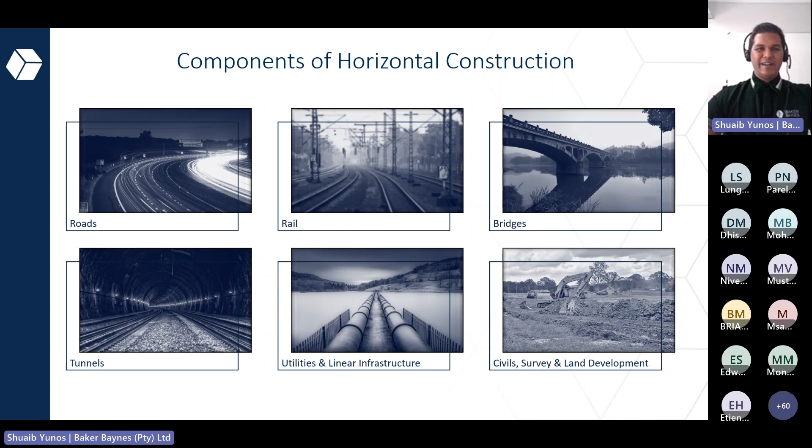So let's look at the industry context specifically from a South African perspective in the civil engineering or infrastructure industry. Now, if we had to simplify this, we would have to say that there are different components of infrastructure. The components being horizontal. So if you're looking at roads, rails, bridges, tunnels, linear or utilities, as well as civils, so your pipe networks, those type of things, we characterize them as horizontal construction. So anything going probably that way, it is horizontal, right? And you can see these are very critical components already from an infrastructure perspective.

Now, we've also got the vertical portion, that being the components of vertical construction. So your typical skyscrapers, your telecom towers, housing, real estate, industrial parks, steel structures, sporting and recreational, as well as medical, commercial, etc. So infrastructure encompasses a wide variety of different components. And it's very important to understand these components because they integrate and also operate in different manners.

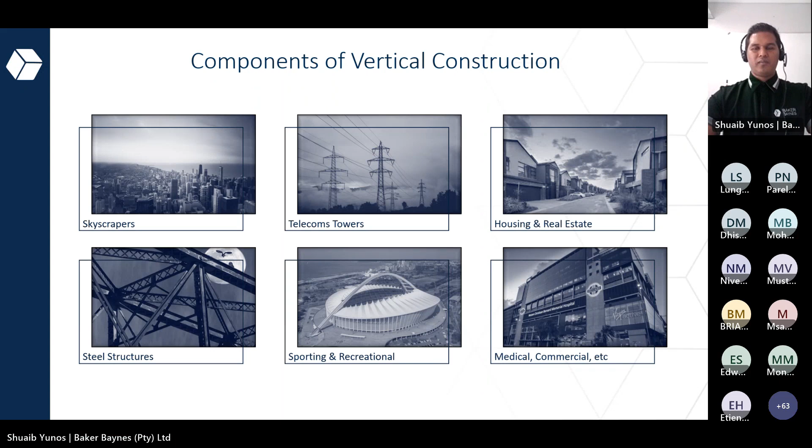Now, I'm not sure if any of you have had a read of this report. It was the SAICE Infrastructure Report Card for 2022. Basically, it had certain grading definitions based on the infrastructure we have here in South Africa, and this was the grading system that was used. It serves as an informatory type of document, so you can read it. It's widely available, and I've got a quick snippet of it that I'll show you in a bit. You can see the grading definition available: A being world class, B being fit for future, and going right down to E, with short descriptions of what these categories comprise.

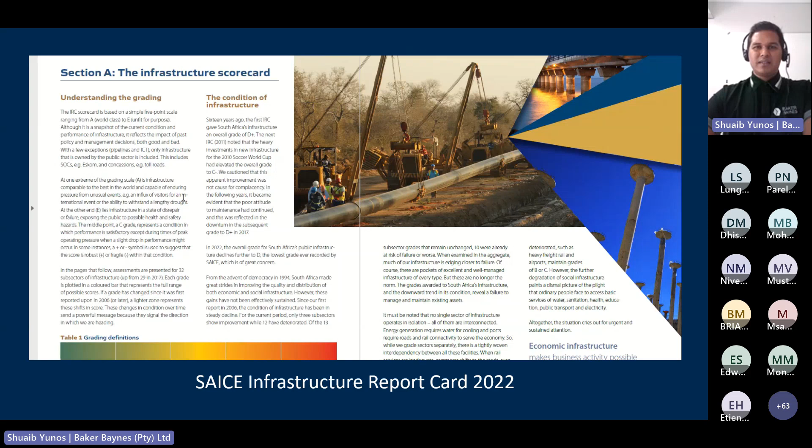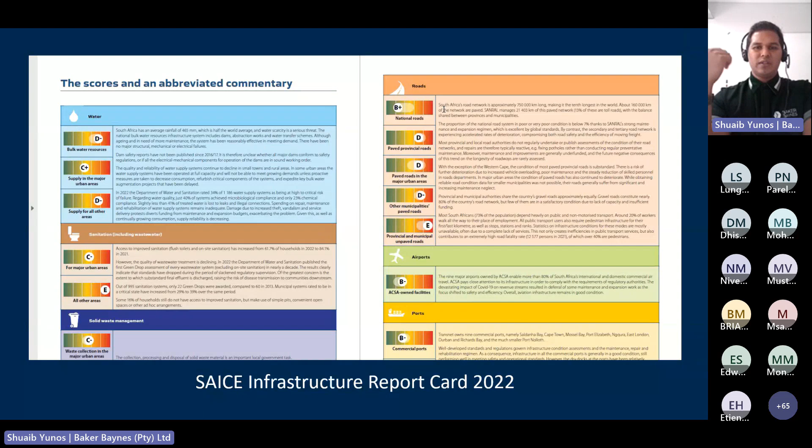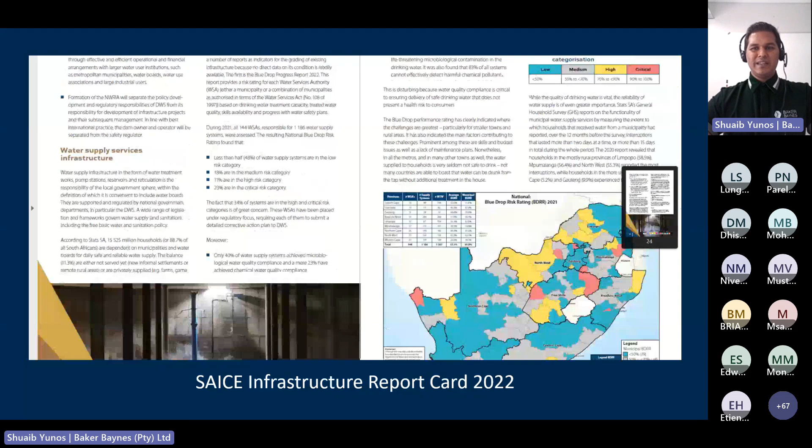Now, if you haven't seen this report card, here's a quick snapshot of it. You can go to the report and scroll yourself. This is where I got the actual gradings, and you can see it characterized per segment: water, sanitation, solid waste, roads, and so on. It's quite a very good report. You can go have a look at it, and it gives you an overview of what things are impacting the infrastructure here in South Africa. There's an agglomerate of different factors, and this report digs into them a bit, also on a provincial level and so on.

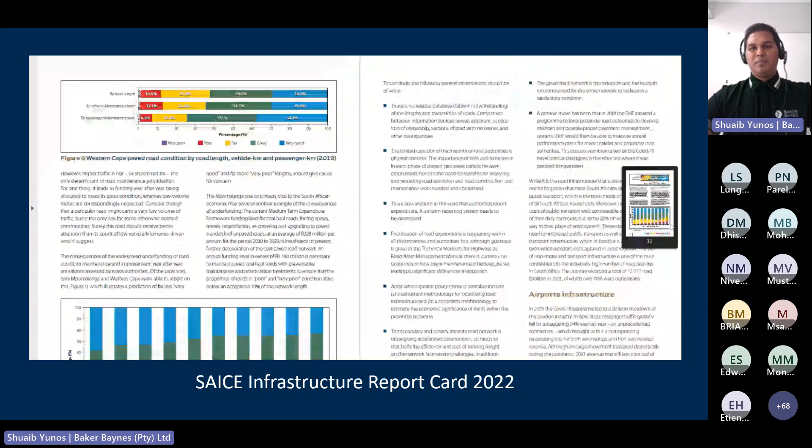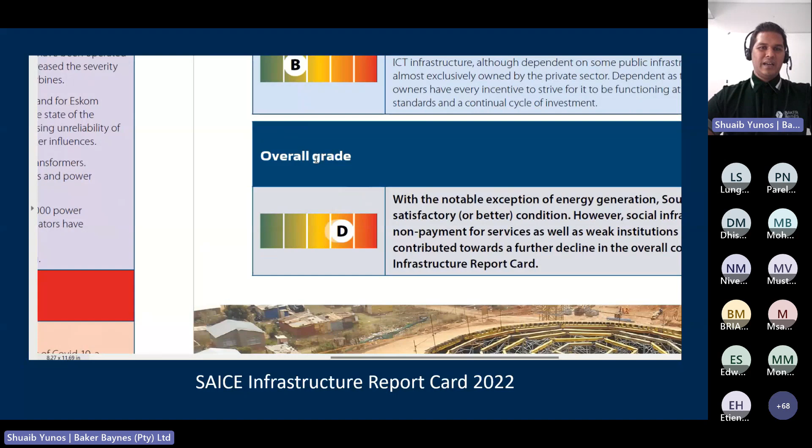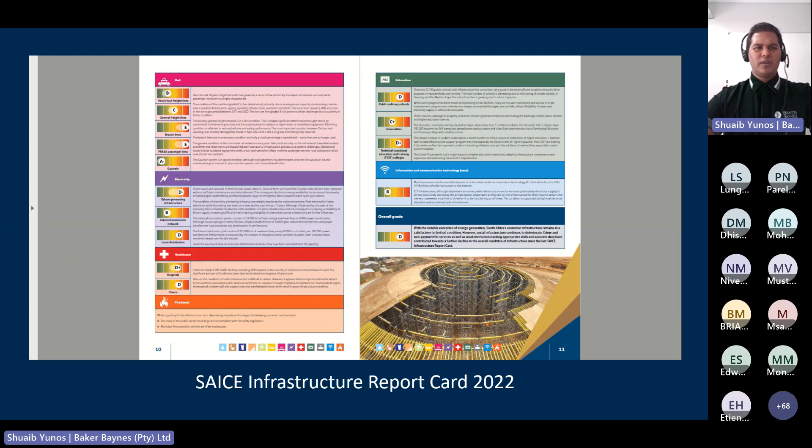So if you haven't read it or heard about it, please go check it out. It's a really informative report if you are a consulting engineer, especially here in South Africa, so it'll give you a good understanding. You can see that the overall grade we got is D, and I think all of us here on the call would like that to be closer to A. This gives you a good snapshot of what's currently happening in South Africa. We actually had a discussion about it last week at the SAICE offices in Midrand, and I think all of the engineers collectively shared these same concerns.

Now, population or demographics, dynamics, all of that impacts what we need as a nation in terms of infrastructure requirements, service delivery, and so on. Based on the data from Stats SA, in July 2022, there was just about over 60 million people in South Africa. That's a large number. It's probably going to be past 61 million by now. I'm not sure, but this is the stats that we get.

Generally, as a technical specialist, we look at the stats because the concept of supply and demand has a great impact on our infrastructure, service delivery, how we would take things, how we can plan. All of this pressure fosters us to think of better ways to provide infrastructure. As a consultant, irrespective of whether you're in infrastructure, mechanical, whatever it may be, you need to look at smarter ways, innovative ways, sustainable ways, economical ways to provide infrastructure. And of course, it's primarily driven by population, demand, and supply.

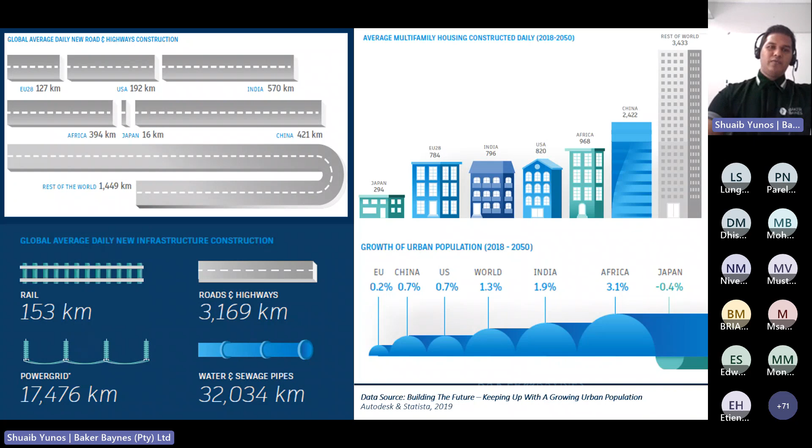Now, just to give you some other stats, this is on a global front. This is a report done by Autodesk and Statista, where they took stats from different regions around the world. If we zoom into Africa, you will see these are daily averages on a global level. I'm going to repeat that - it's daily, not monthly, not yearly, it's every day. So if you look at Africa from a road perspective, we need to construct about 394 kilometers a day.

Again, this is primarily governed by population, infrastructure demand, and so on. Because of the rate of urbanization, we're going to need to look at smarter ways, more resilient ways, more intelligent ways to actually do things. So we've got Africa at 394 in terms of roads, kilometers per day. In terms of buildings, we're looking at about 968. And if you look at our urban growth as Africa, projected to the year 2050, we will have the largest urban population projection at 3.1%. You can see the rest of the world is currently looking at 1.3%, and the closest being India at 1.9%. So Africa has a lot to develop, a lot to look forward to, and also a lot of opportunity.

So this gives you a global context. We've got a local context, we've got a global context, and you can see that infrastructure demand is a really concerning and imminent thing that we need to solve. You can also see rail is at 153 kilometers, power grids over 17,000, and water and sewer over 32,000. Those are all staggering numbers. And the fact that it is an average daily account or data, that is also quite concerning in terms of how we will keep up with this growing urban population, the demand and the supply.

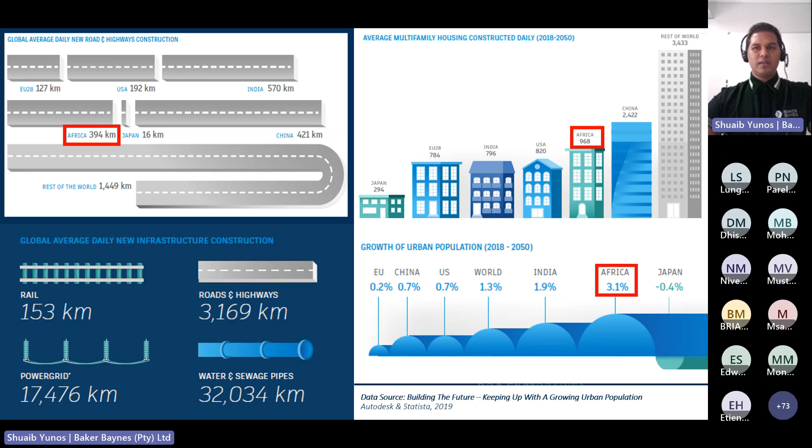Now, based on our experience and the projects we've been involved in over the years, we attribute it to the old way of thinking. There's a lot of factors that contribute to the lack of providing infrastructure on time, on budget, economically and sustainably, but one of the key ones is actually digital transformation.

In our sector, digital transformation unfortunately is lacking. It is growing now over the years with the awareness of different methodologies and technologies, but still, majoritarily, you're looking at the old way of thinking. So what do we call the old way of thinking, or what does it look like?

Before going onto the digital sphere of things or onto a digital platform, we did things on the drawing board, technical drawing. The first jump was, of course, using AutoCAD. That was the first wave of digital transformation, where we migrated from the drawing board onto a computer screen, and that was, of course, AutoCAD.

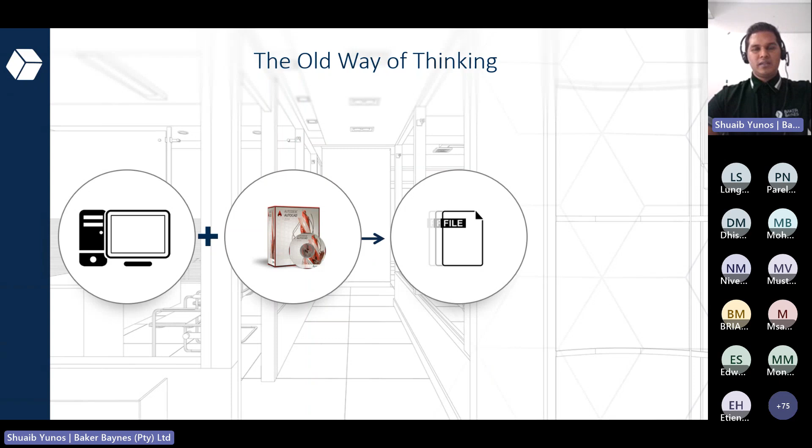Unfortunately, people are still using this elementary technology. Of course, it is purpose-built depending on the application you're using it for, but however, if you are looking at metadata, informed asset management, maintenance and so on, it's not really suitable.

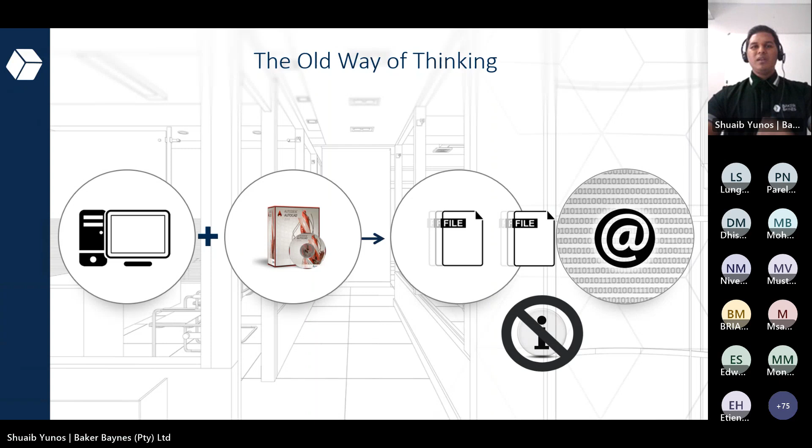And the reason why we say that is generally you would PDF it, we all kind of PDF it. We don't give a 3D model with metadata or asset data attached to it; that is normally shared via email. The problem with this is the loss of intelligence and crucial information that you would need, especially at the handover stage of the project.

So if the custodian is the government or municipality or wherever it may be, it's just lines. Whereas if you have a digital model that's data-rich, visually impressive, you could simply click on, for example, a pipe, a column, a road, and get the elevation data and so on. Whereas with this methodology, if you click on a line and it doesn't have text on it, you don't know what it is. It could be a fiber network, it could be a pipeline, it could be a road center line, it could be whatever it may be.

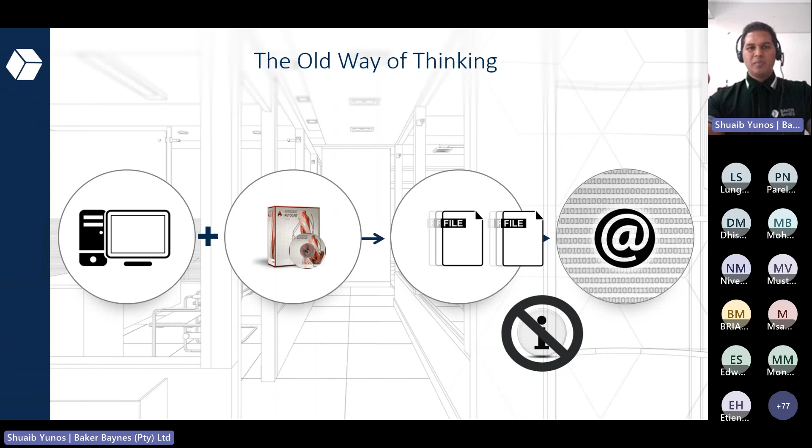And this is the old way of thinking. Unfortunately, as you can see from the stats I've just shown you, this way of working is not conducive to actual intelligent, effective infrastructure delivery, because you're not going to keep up - it's manual. It's very, very intensive in terms of getting to an end product that is resilient, economical and sustainable.

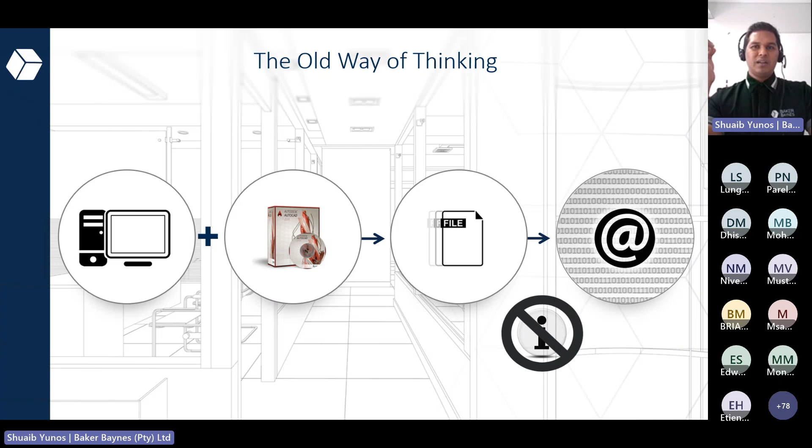And this is where actually BIM comes in. So BIM is a methodology that will get your project started off on the right foot, full of intelligence and innovative flair. So what is BIM?

BIM is the acronym for Building Information Modeling, or Better Information Management, as it is now popularly being attributed to. If you haven't heard about it, that's great - this is the place to be. We're talking about it; it's an informatory webinar to all of the consulting engineers out there.

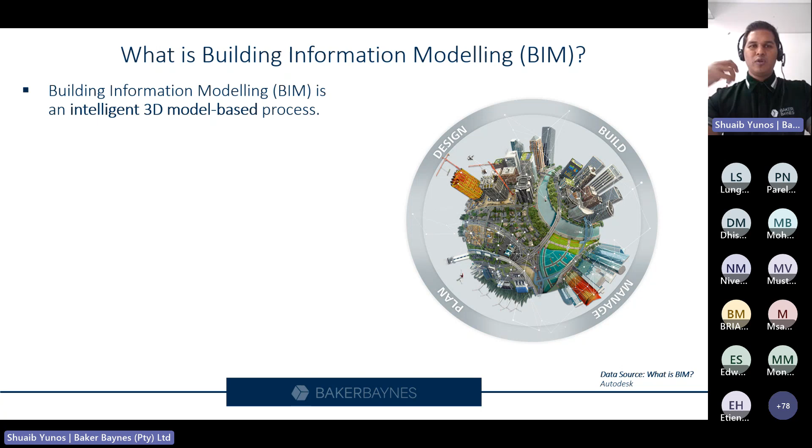So Building Information Modeling, or BIM, is an intelligent 3D model-based process, and it can be applied in a variety of different disciplines or industries. I would say the more popular one in terms of uptake and application is the AEC industry - architecture, engineering, and construction. But we have applied and utilized it across other industries such as process plant, energy, manufacturing and so on.

That type of workflow or project methodology we call a convergence workflow, where you've got - we call it Lego construction - where you would need to partner with manufacturing, prefabrication and so on to create infrastructure much more intelligently, faster, and of course economically. So BIM is applied in these different workspaces.

Now, why is it so popular? You might have heard it all over, either on LinkedIn or whatever social media. If you read a lot of white papers or theses or dissertations that are coming out, they're actually focusing or swaying towards BIM here, and it's an effective way for lifecycle management on a building or infrastructure project.

But of course, BIM is just not the technology. Connected BIM is the incorporation of cloud computing and functionality, as well as a common data environment, which we will then touch on in a short while.

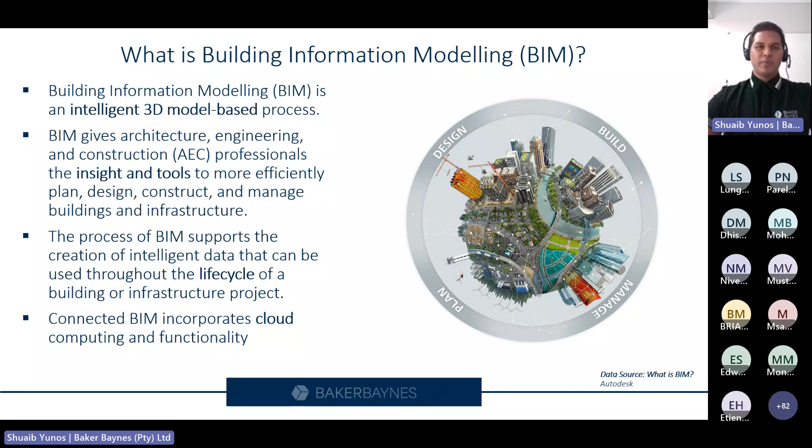So speaking about BIM, there's also a misconception that it is just technology. Remember, Building Information Modeling is a process - technology is a part of it, it's not the only thing. A big part of that is building standards as well as working processes. So again, it's not a software alone or a physical item or object; it is focused on the efficient management of the project lifecycle.

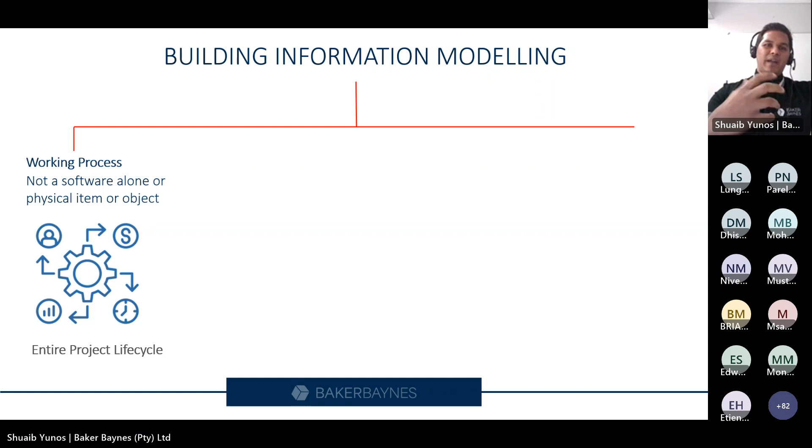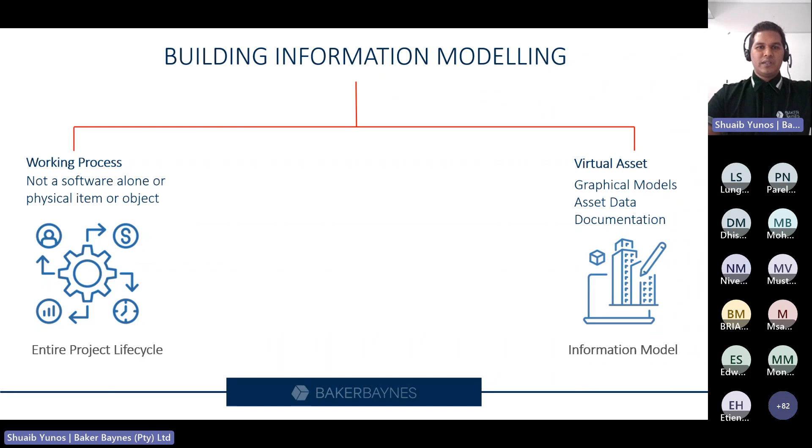At the end, you should get a virtual asset. That could be graphical models, asset data, documentation, or simply information—an information model which is intelligent, streamlining asset management operations, and of course, extensions. But the key thing is the actual information.

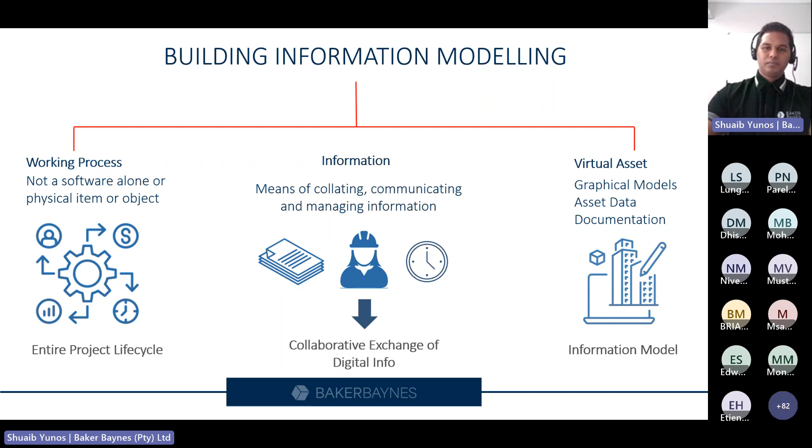So how would you collate or bring together the information, how would you communicate with different stakeholders in a consortium, in a multidisciplinary environment, how would you manage that information. This is all done digitally. That's why we call it better information management—if you have all of the processes and methodologies attached to the project housed under a common data environment, you have all of that information to better run and maintain that asset.

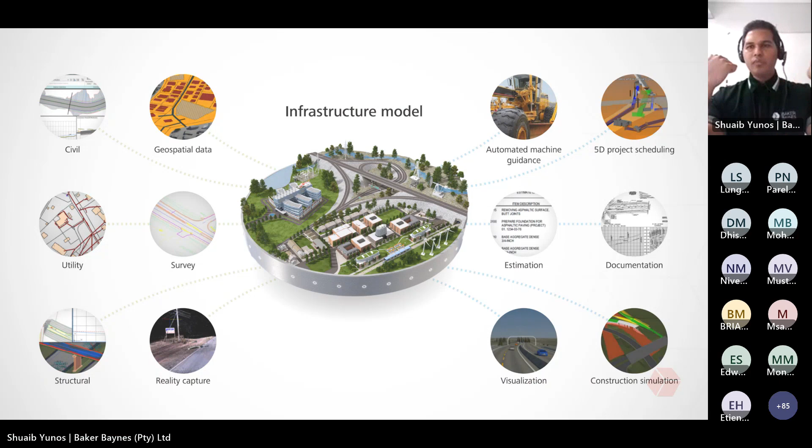And 5D being the attachment of both time and cost to the actual 3D model. So it's absolutely amazing. You could use it quite nicely, much more insightful.

And again, it informs resilient infrastructure because you could consolidate all of the different models from the different disciplines in consulting, and you could run a clash detection where you could see that the pipe is in the wrong place, the column is in the wrong place, maybe the ducting is also not tying up correctly, and you could address that to the relevant consultants. So you have all of that at your disposal before even hitting ground on site, which is absolutely amazing, so that you can reduce variation orders and certificates that you would normally get, extension of time and so on.

And as you can see, estimation is also a big part of it. So you're getting accurate quantities, because it's linked to a 3D methodology, it extracts the quantification directly from the model. Whereas the old way of working is we had the plan view, the section views, the elevation views, and we relied on taking those 2D views, and when we put them together, hopefully it will give us the correct 3D infrastructure asset that we're building.

Whereas here, the 3D model or infrastructure asset is at the heart of the technology process, and the views, elevations, and sections are extracted from this model. So if there's any change in elevation or thickness of a material or whatever it may be, or a shift of an alignment, it updates in the corresponding section and elevation views.

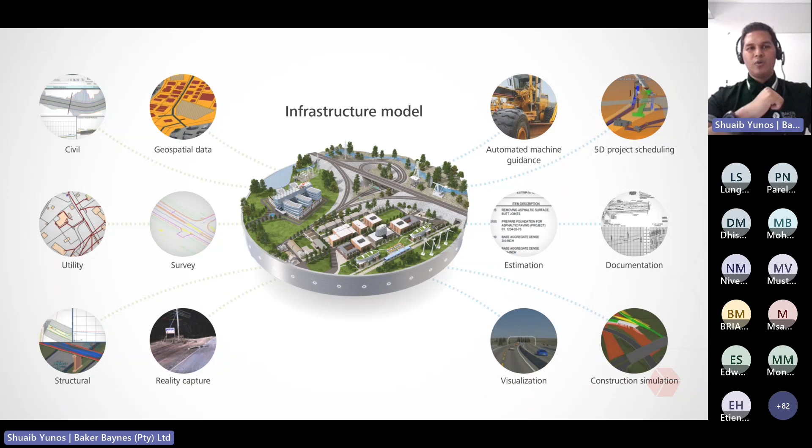Speaking about that, this is where the common data environment comes in. So a truly BIM process, in its entirety, cannot be completed without the incorporation of a common data environment, a CDE. Now it is more on the cloud. We've seen a lot of different processes, also companies and organizations, move to the cloud. The acceleration of this, or the catalyst of this, was actually COVID, where we couldn't go onto the construction sites, we couldn't go onto the mining sites.

And we had to collaborate in such a manner that we could talk to the construction teams, connect the design office to the construction office, ensure that everything was going on site. So what was designed versus as-built was coordinated effectively, and cloud was the solution that was seen to be the successful recipe. Now, an incorporation of a common data environment serves as a single source of truth, meaning everything on your project should be housed on this.

It could be teams, it could be the permissions of those teams. So if I was the civil engineer on the project, I don't need to see what's happening on the electrical or mechanical side of things. So if I logged into the project based on my permissions, I will only see, for example, the civil infrastructure designs. And it's not only limited to the designs.

You can have your claim certificates, your construction logs, your daily site logs, your rain days, you can have photos on there, approvals. So if you need something to be approved on site, or if you need to request more information...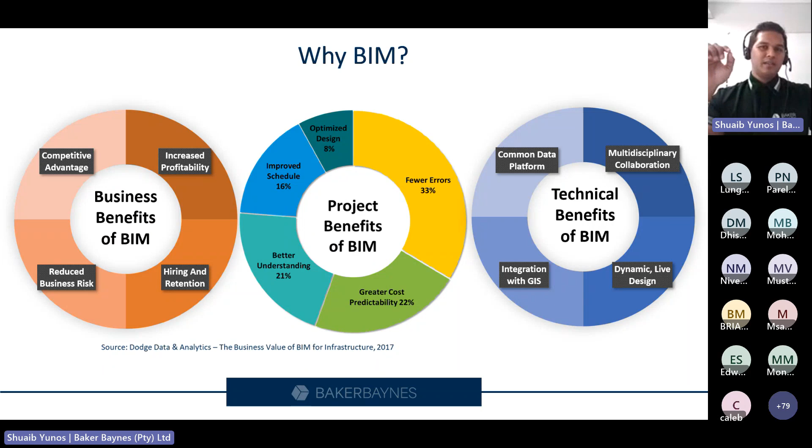So I've given you a good rundown of what BIM is. I've given you the stats. I've given you the scenario in South Africa. I've given you the global context. But what's happening here in South Africa, right?

So I'm going to show you some projects that we've been involved in here as Baker Baynes, in a variety of different sectors, and we call them BIM success stories.

So the first one is, of course, a bus rapid transit station or system that was being needed to upgrade in the Sandton area. I personally headed this up as part of Baker Baynes. You can see this was a very complex project, and why I say that is it had a varying median, and a varying retaining wall that split the mixed traffic from the other components in that area.

It was very confined, meaning we were concerned about the space, whether we would be able to fit all that infrastructure in. Also, the positioning of the station, you can see the high floors and low floors, whether it's going to be coordinated correctly, the setting out data, making sure the grades were correct, all of those things in a confined area. And of course, being Sandton, the aesthetics is a big part of it.

So the 2D design of this, as an engineer, I think we all understand our technical drawings, but if you have different people in the consortium, maybe someone's just funding the project, or someone that's not as technically engineering inclined as yourself, you need a visual model.

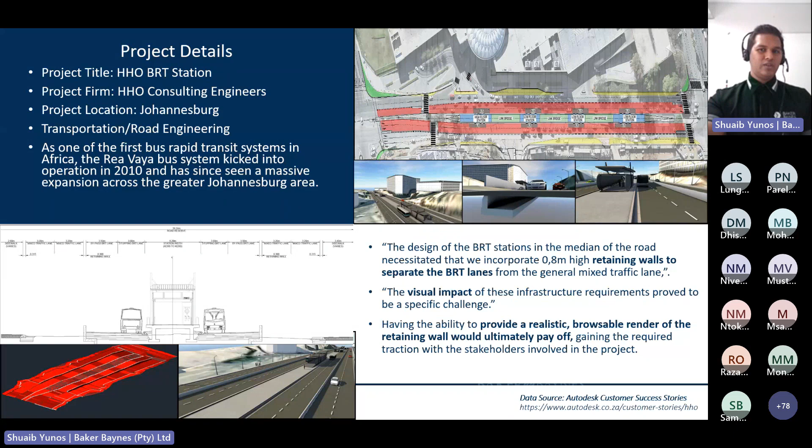So this helped a lot, and it was a great example of showing that on transportation projects, because they're so complex in nature, being linear and traversing different areas and value properties, you can translate it in a visual manner as well, being intelligent and engineering compliant. So that's just one example from a transportation perspective.

This was a very impressive project also that we did, for the Kangnas wind farm. It was a great example of the BIM convergence workflow, because you have a lot of the mechanical, process, plant, energy, mining sectors here. And of course, the site civils is everywhere, so you need to grade the site, the setting out, and so on.

And you can see it was responsible for lighting up 155,000 homes.

That's a big responsibility, and you can't use the old way of thinking on this type of project, because you'll end up pulling your hair out. It's not going to be great from a costing, quantification, and so on. You can see the convergence workflow using intelligent processes to do the infrastructure, linking it with the civil design. There were a lot fewer issues to deal with, and of course, the embracing of a common data environment. So this project, again, very impressive, and it was in the Northern Cape.

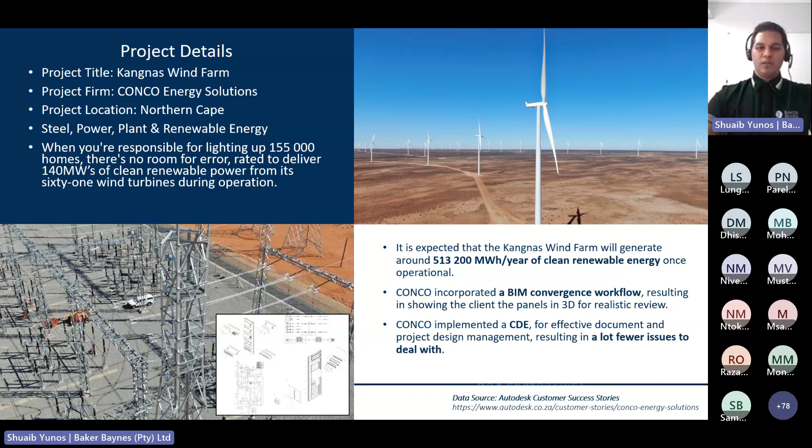This one was also a very innovative project from a building and systems perspective. It was a medical facility for Mediclinic in Cape Town, and it is one of South Africa's few 5-star Green Star SA rated buildings. So it was very sustainable, reaching that Green Star rating. And look at this, the design versus the as-built - that is amazing, right? It's quite purpose-built. You know what you're designing, and you can coordinate it better.

It increased the consultant's workflow anywhere from 15 to 30%. And of course, as you apply it and keep wielding this process, it just grows incrementally. So again, this was a very cool project, and no problems - everything was to the T.

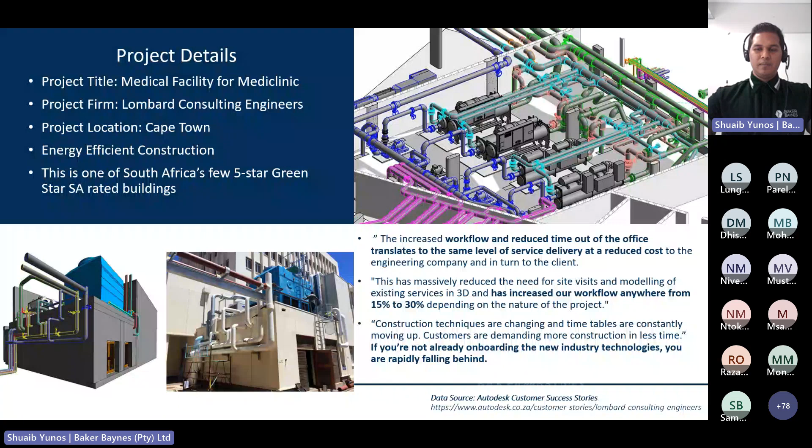This project was a very comprehensive project. It was the Seriti New Vaal Colliery Lifex feasibility project, located in Vaal, and it had a lot of different complexities, right? This project involved civil, structural, mining, steel, reality capture - there were a lot of things that you had to integrate, again using BIM, just the technological component.

The reason why I'm showing you the technology component - I think more people can absorb that better, right? Some of these incorporated the full scale, incorporating a common data environment. Some consultants, because they were new at it, started at the technology space, which we see in South Africa and Africa being the first step that consultants are taking - start with the technology, right?

So you can see just some of the models that were designed from this. The project was 176 days long, and of course there was a 30% gain in productivity. And this company, Junkoon and Associates, is incrementally also gaining - there are some projects where they've reached up to 80% in efficiency. Just look at that, transitioning from the old way of thinking, or 2D workflows, to 3D BIM technological workflows. Just the technology component is so impactful, right?

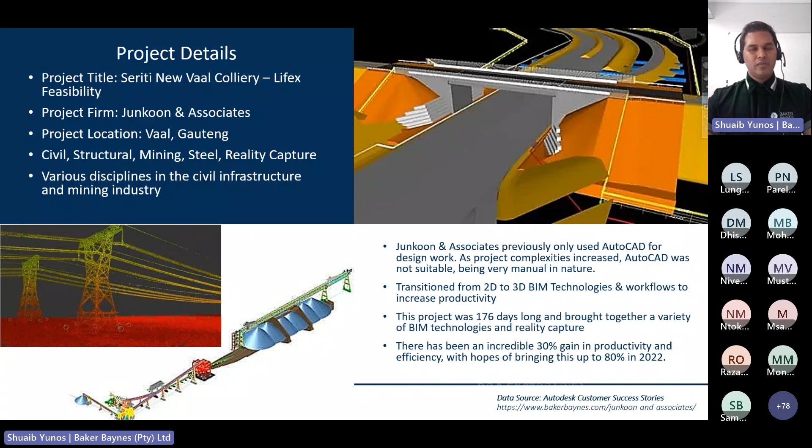Imagine incorporating the common data environment, having all your data on there - your finance, remember, on the common data environment, you don't only have to have the designers. It can be from project inception right up to handover. So all of your accounts, your accounting, your financial team, your contractors, whatever it may be - all of that data can be housed on a common data environment.

So that just gives you a context of what we've been doing here in South Africa as Baker Baynes, and you can see the proof is in the pudding. Those are just some of the success stories. If you want to check out more, you can always head out to our website or hit me up.

There is a lot of good stuff that's happening in South Africa and on the African continent in general. So just keep your eyes out for those type of things, or if you want to find out, just reach out to us. So from a global context, what is happening with BIM? Is it really making waves overseas? What's happening on our African continent? All those type of things.

The technology, like I said, is just the entry part of the BIM ecosystem - there's so much more that it goes into. And of course, it's governed by methodologies, standards, workflows, processes, and so on. So you can see it's not just something I'm telling you for the sake of telling you - it's a global thing, and it's filtering down to Africa. And I think soon - I can't give you a timeline - this might be mandated. I think it'll have a good impact on our infrastructure, because we'll be creating infrastructure that is intelligent and resilient. So that's just a global outlook on things.

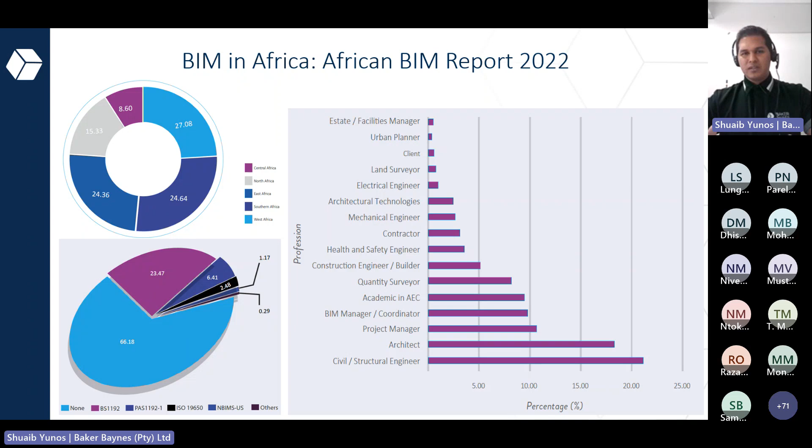The majority currently have no standard. There's no mandate yet—I say yet, because it is swaying towards consultants taking it upon themselves to start working in the new normal, or a better information management type of ecosystem. So we've got good context over Africa, globally, and so on.

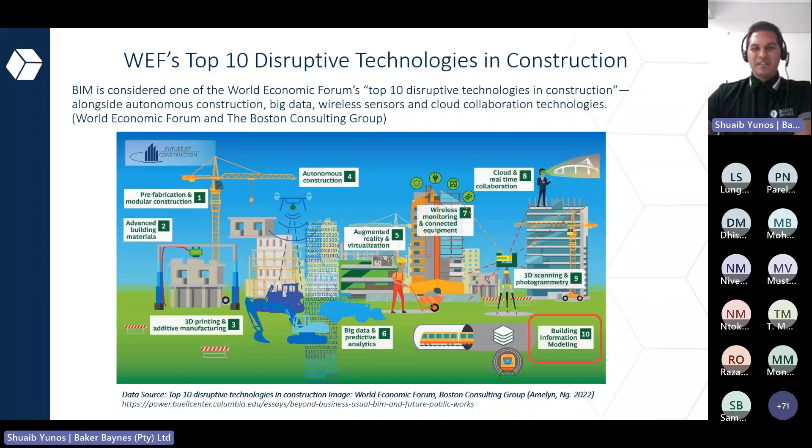Big data would be linked to everything here. 3D printing or prefab—what we call Lego construction—are two very big parts of the convergence workflow. And of course, advanced building materials—if you haven't checked it, go read a few papers, it's really, really interesting and exciting as well. Okay, so that's where we are. Now, the road to BIM can be daunting, like I said, there's a lot of different consultants that have started.

Majority haven't, even though they know it will be fantastic for their position as a consultant.

Just to give you a quick rundown of what the road of BIM looks like, very summarized. I already touched on the technology—you're going to need intelligent tools to do intelligent processes, there's no doubt about it. If you're still sketching things, or I've seen this on certain mining sites where they're still using color pencils to mark things off on a hard copy, that shocked me. So technology is a big part of it.

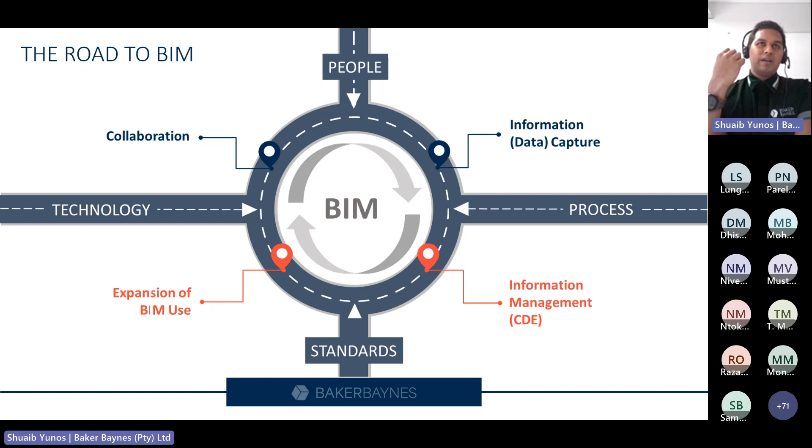Now, of course, you're going to need the people as well, to run the technology. Collaboration is a big part of it. When you've got the people and the technology, you need the processes and standards that come into fruition for this—they work hand in hand. When you get all of these ticked off and have a smooth transition, information capture or data capture is a big part of it—how you interlink that with your people, processes, technologies, and standards. Then the asset can be expanded in terms of use. So expansion of use, or BIM use, a common data environment, all of that promotes the longevity of infrastructure that we design as consultants.

This BIM model, or the asset that is produced at the end and handed over, forms the foundation of digital transformation and digital twinning. A lot of you have probably heard of digital twinning—remember, the model itself is not a digital twin. If you have a 3D BIM model with a lot of data attached to it, so if you click on a column you can see what I-section it is, properties, whatever it may be, that's great. That's the starting point or foundation, the first block you need for a digital twin, or what's recommended for one.

Some people just use sensors on an existing asset and link it to a dashboard with infographics and stuff—that could work. But if you have a digital replica, like a model you're seeing on your screen, how cool would that be? It would be like Iron Man vibes, right?

You'd have the 3D model there and you could click on it, check the live flow. We've seen this on factory projects where if you click on the pipe, you've got the digital model on your screen—you could monitor the flow, the temperature of the pipe, and depending on how you set it up, you can even flag it for maintenance, like 3 months ahead, telling you to replace this pipe. So you could plan and schedule plant shutdowns more effectively, and so on.

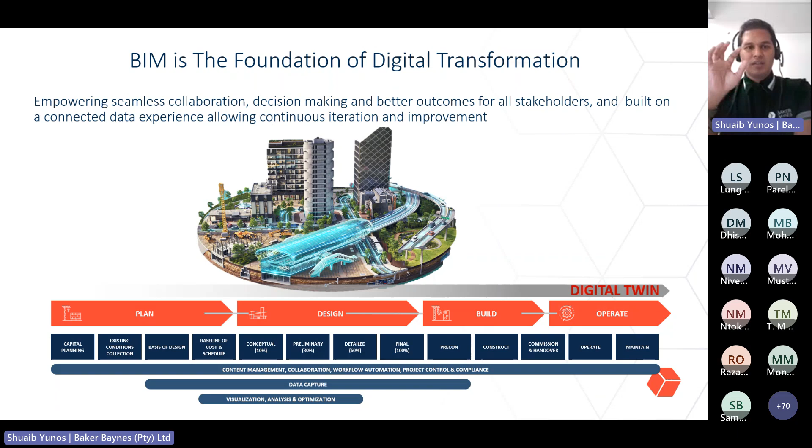Buildings, I think, have adopted it the most effectively—the architectural built environment, the plant environment, is the number one. From digital processes and prototyping, that's where the concept kind of started, and you could take that to digital twinning.

If you use intelligent processes, technologies, and integrations, you have transparent workflows that are sustainable and economical. You can troubleshoot things way before construction, and inform maintenance way before the actual end of the life cycle. It's all an evolution towards a new design process.

So the peak of your pressure is currently in your pre and design development or schematic prelim phase. You want to lock everything down here so that when construction comes, you just have a few tweaks.

You change, literally - I've been in situations where I've just changed the tender drawing title block to say tender drawings, deleted that, put in construction drawings, because everything was on point. You can get to that level. So you don't really need to change anything.

So this workflow or process allows you more flexibility from a cost, troubleshooting, feasibility, planning, optioneering process at this juncture of the project, because you don't want to be making critical decisions when you're in construction.

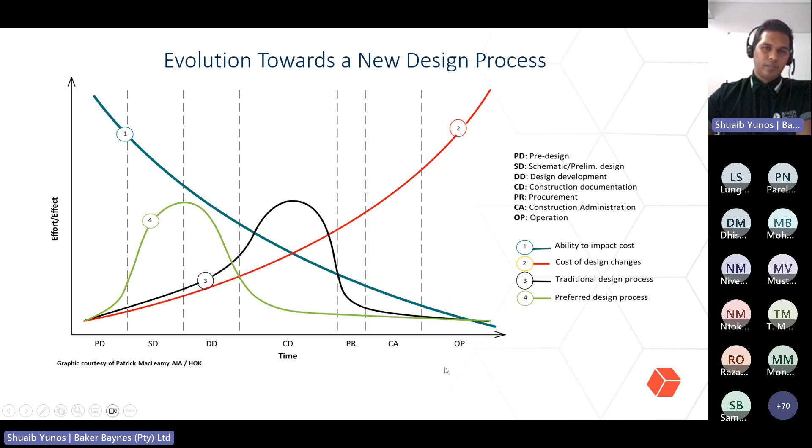You want to lock everything in here so that everything else transitions smoothly right up to operation and handover. So this is where we need to be as consulting engineers.

So based on what I've told you, how can I help you? I can't just leave you in the lurch, right? So how can we help you as Baker Baynes or as a BIM technical specialist? This is what we literally believe in - digital transformation. We help consultants through digital transformation so you can design and make a better world.

And the two main things as a technical specialist, this is how I see we can help you as a consultant, or how you can even help yourself. Education, like webinars like this, knowing what BIM is, hearing about industry trends, it's a big part. Also, from a training and upskilling perspective, from beginner to advanced, we can help you with that.

So for example, if you're a fresh grad, even if you're a senior seasoned engineer and technology is a bit radical to understand for you, right - but you have all of this practical wealth of experience, and then you've got the graduate that has the technological savviness, but practicality not so much, you're just starting off. So we can help you with understanding the tools, using them in your different industries.

We currently have 3 CPD accredited courses that can be done in class or virtually, online as well. So if you are a very busy person, or if you are an RE on the site and you want to catch up on consulting work, or you just capacity wise, it's a bit of a nightmare for you.